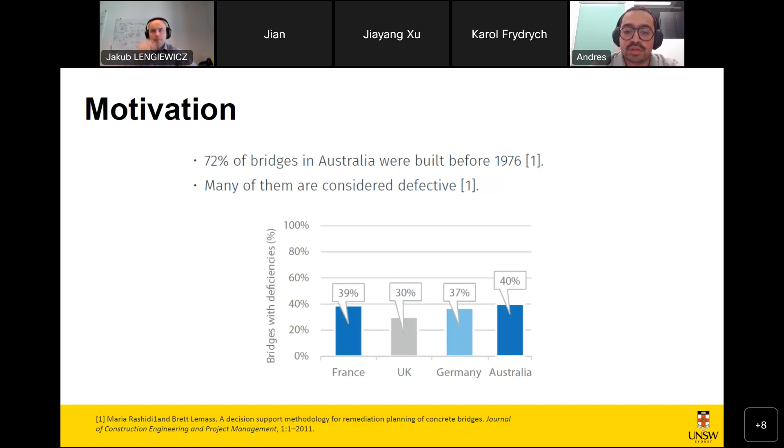Okay, so the motivation for studying bridge health monitoring is that currently in the world a large percentage of structures, especially bridges, have already completed their average expected service life. For example, in Australia, around 72% of bridges were built before 1976, so they have already completed their average expected service life. And many of them, not only in Australia but in the world, are considered defective. Approximately 40% of the bridges around the world are considered defective.

So currently in the world, there are two main types of inspection that are applied to any type of bridge. The first one is visual inspection. This type of inspection is a very time-consuming task, and as you might imagine, it is very subjective to the inspector's criteria. Even though there are standards for doing this, it's still a subjective task, and again, very time-consuming.

On the other hand, we have conventional structural health monitoring systems. These systems involve the installation of many different types of sensors on the structure, which measure its response. From the measured response, we can identify whether the structure is in a healthy state or damaged. But the problem with these conventional systems is that they are very expensive in terms of installation and maintenance, and they are unique for each structure. So applying this technology to all the bridges in a country would be a very expensive task.

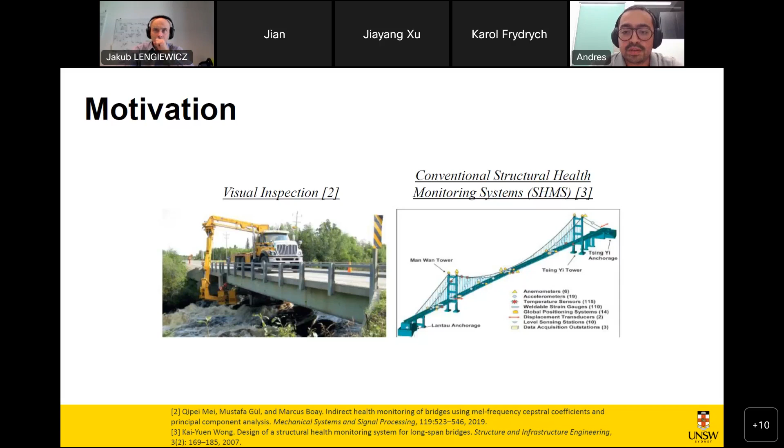So for this reason, during the last decade, researchers have studied a new alternative called drive-by bridge inspection, which is an indirect structural health monitoring technique. This technique consists of an instrumented vehicle, generally instrumented with accelerometers. The vehicle passes over the bridge, recording an acceleration signal, which has information from both the bridge and the vehicle. So this response has coupled information from the combined bridge-vehicle system, and by studying this signal, we are able to identify whether the bridge is damaged or not.

So the advantage of this method is that it's much cheaper than conventional structural health monitoring systems. And also, they have the ability to be extended to different structures. So those are the main advantages of this. However, there are still many challenges to cover with this technique, and today I'll cover some of them.

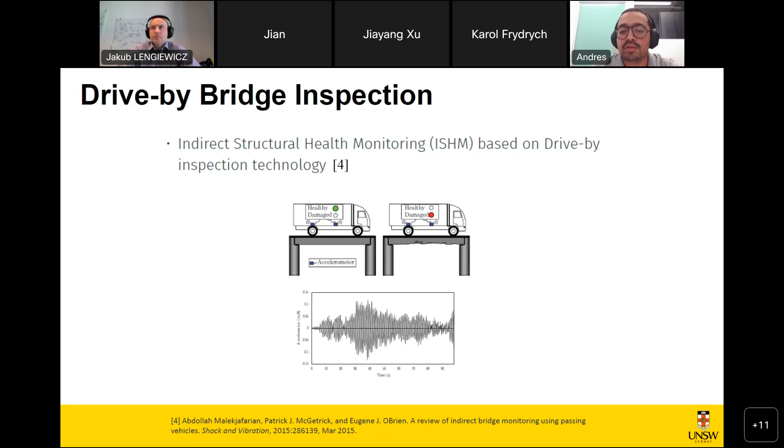Okay, so when studying these signals recorded by the sensing vehicle, we can divide or classify these techniques into their level of damage assessment. So the levels of damage assessment are three main levels. The first one is only damage identification. Level 2 is localization, and level 3 is quantification.

Additionally, these techniques used to identify the signal from the vehicle can be classified into major groups. The first one is physics-based methodologies, which can reach up to level 2 of damage identification, that is localization. But these techniques require previous knowledge of the structure, such as the dynamical properties and other types of properties of the structure that we can compare with, that are taken as a benchmark state and then compared with other extracted features from the signal to assess the damage. So this knowledge of the structure is not always available. So this is a major drawback of physics-based methodologies.

On the other hand, we have data-driven methodologies that can reach up to level 3 of damage assessment, so we can identify, locate, and quantify the damage. These methodologies are mainly focused on signal processing and supervised machine learning. However, as you might know already, if we are trying to use supervised machine learning, we would require information from all the bridge states. That means healthy states and damaged states of the structure, which is very difficult to obtain. Probably it's impossible to obtain information from damaged states. And so training these algorithms in real practice is not always useful.

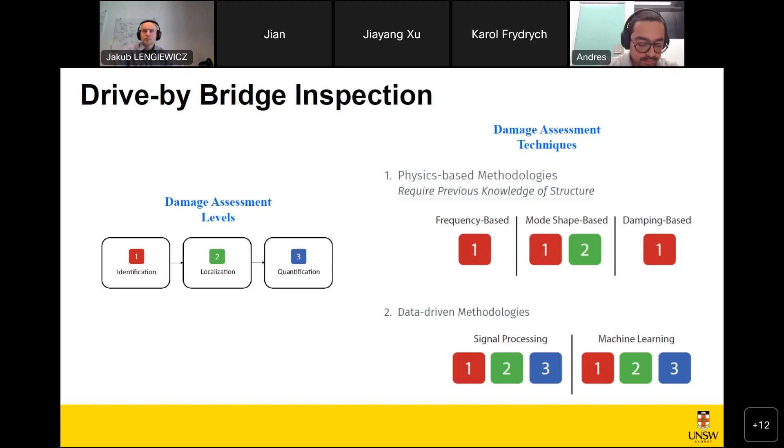So this is the reason why in our research group, we try to focus on developing unsupervised learning approaches, which are mainly trained with benchmark states of the structure or the healthy state of the structure. Okay, so now we'll talk a little bit about the convolutional variational autoencoder. Some of you might have heard about it. So as I mentioned, with this algorithm, we intend to use an unsupervised method to identify damage. And this method should only be fed with healthy data of the bridge, because in real practice, that's what we can measure in real structures.

So, okay, convolutional variational autoencoders or variational autoencoders are generative models used for unsupervised computer vision, and their aim is to reproduce images. So for the ones that are not very familiar with this topic, I'll go through the three families. So first I'll go through what is an autoencoder. So an autoencoder is a type of neural network whose aim is to reconstruct some input data, and to deconstruct some input data into a low dimensional space. And from that dimensional space, try to remap that input data. So basically, we have an algorithm that is trying to reconstruct our input data.

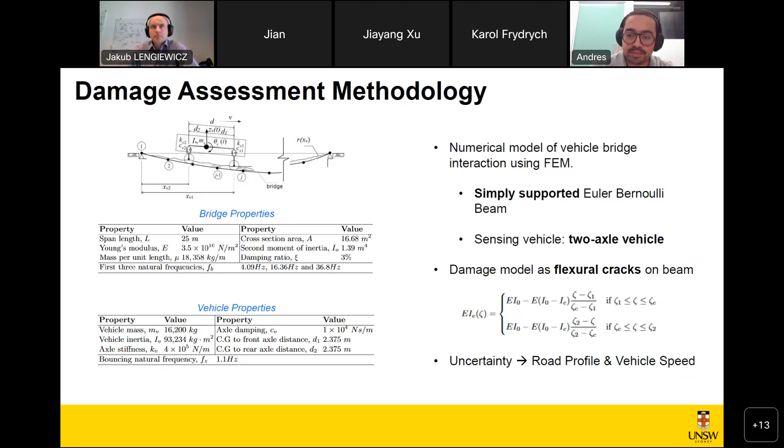The second step is to align the signals, because since this is a two-axle vehicle, the first step is to align the signals in space, so that the signals are aligned from the moment each axle enters the beam to the moment each axle exits the bridge. The next step in our processing is to calculate the continuous wavelet transform, which is a time-frequency domain representation of signals.

And we do this for both axles, from the acceleration from the front and rear axle. The third step is to calculate the residual CWT. And what is this residual? CWT is the difference or the subtraction of the CWT from each of the axles. The reason why we do this is because we notice, and it has been reported in other literature, that this process can partially reduce the effect of the road roughness in the acceleration signal that we measure.

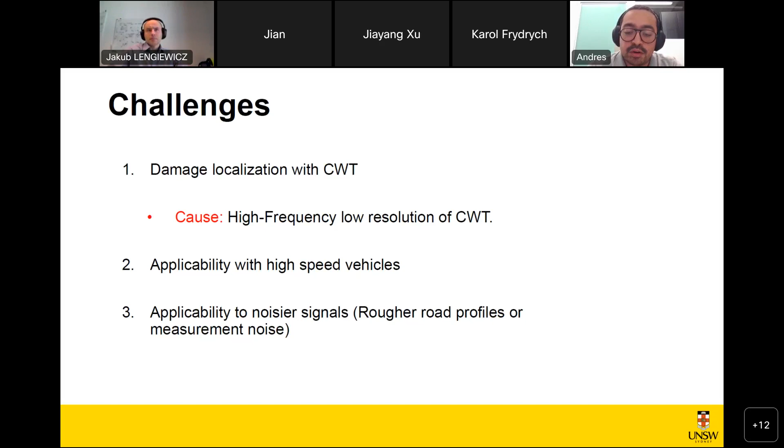And lastly, noisier signals can also reduce the performance of the algorithm. These noisier signals can come from rougher road profiles, or when the signal is very noisy, purely from the measurement noise. So our future work in our research group is to identify a better feature to locate damage, maybe a different time-frequency domain representation, different than the CWT.

The next step that we're working on already is the vehicle optimization, the properties of the vehicle, like the suspension, mass, and all this, because there's an important fact that different vehicle configurations can perform better than others. So a vehicle optimization is needed for this.

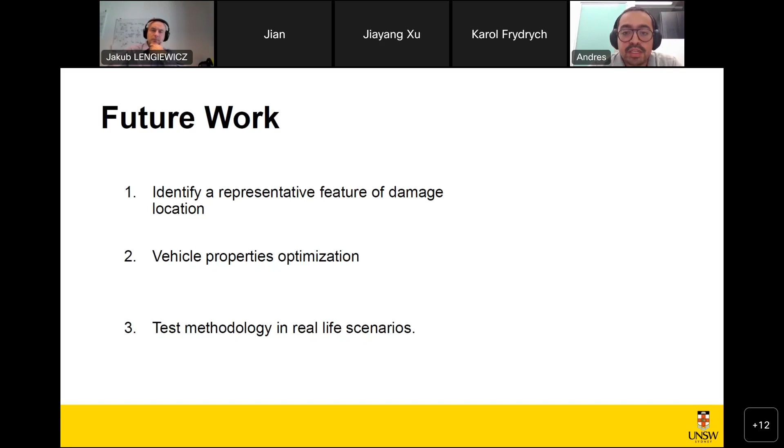So yeah, that's it for our presentation. This is our methodology for bridge damage assessment.

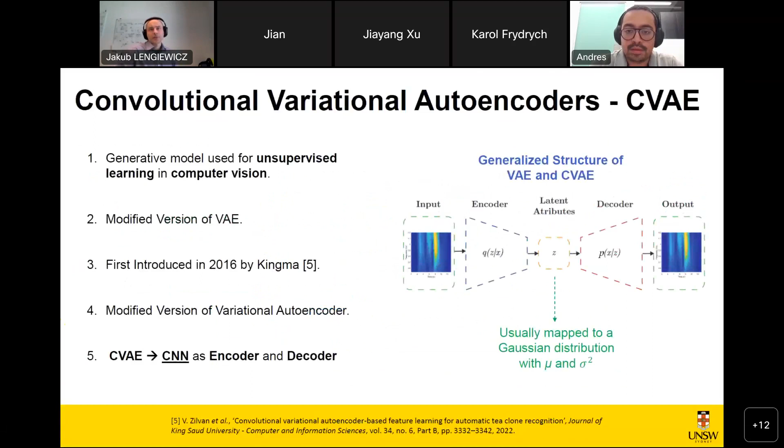So let me ask a question about the neural network model, the deep learning model that you are using. It is a stochastic model, right? Variational Bayes for this sort of model. But I was not sure what exactly the model was, how it was built. Can you show maybe one of the first slides in which you showed the architecture of your neural network? Something like this. Okay, this one is good, the schematics.

So you have this encoder part, then you have some latent layer or latent neurons, and then you have the decoder part. And this is the autoencoder setup, right? So you are aiming to have the same input and output. That's your loss function, that's the aim. Yes. And then you mentioned that the stochastic part of your neural network is the latent part, right? So my first question is whether the stochastic parameters are the weights or the neurons themselves, the values. What's your stochasticity? Those are the values.

Because that's how I understand it, that's the difference from a variational autoencoder to an autoencoder. An autoencoder just generates this low dimensional output from the input, and purely from that low dimensional output, you pass it through the decoder and try to reconstruct the image.

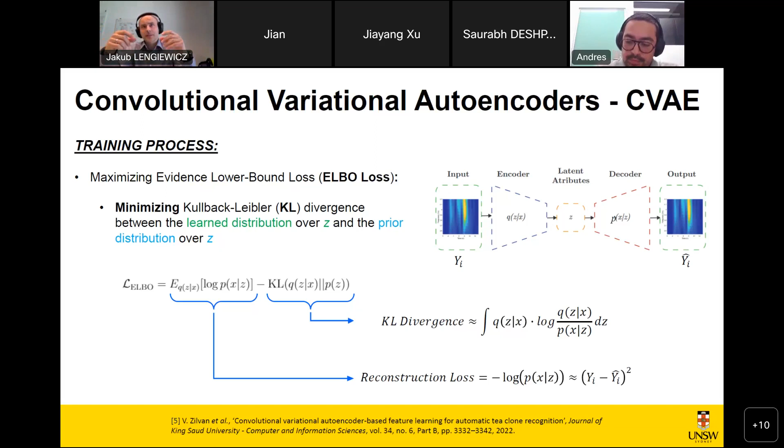So this framework, once you have it, this unsupervised autoencoder framework with these stochastic capabilities, how is it then used in the damage detection to compute the damage index? Either I missed it in the presentation, or I was taking some notes when you mentioned it, but I didn't get the idea how this neural network or deep learning framework is then used in the identification process. This was not clear.

Okay, so as I mentioned, the training process is performed using only images, like CWTs, from the healthy state. So basically, the algorithm learns to reproduce images only from this state. The way we use it for damage identification is that when we input a CWT that is somehow different from the inputs used for training, the reconstruction error is increased. So we use this error as a damage indicator.

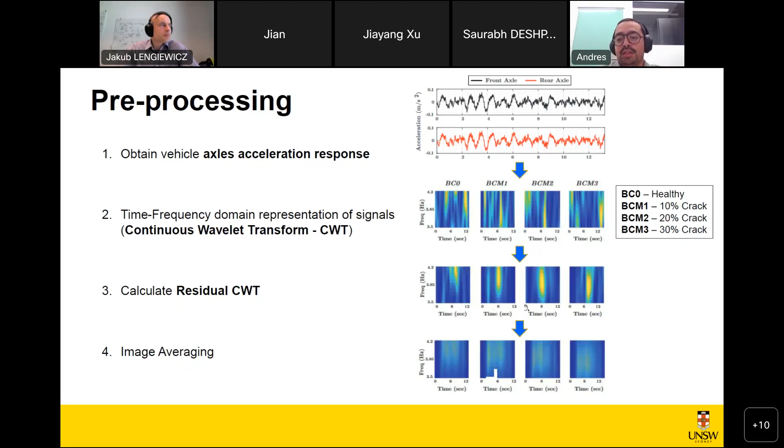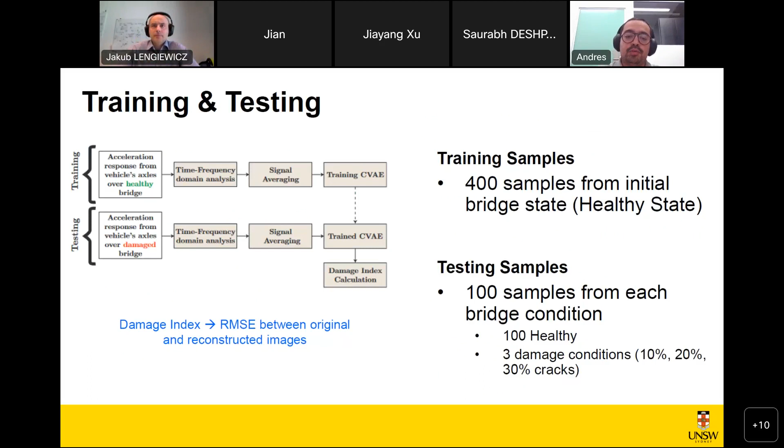So you need to have a healthy model for each bridge, more or less. Yes, exactly. In practice, we wouldn't call it a healthy bridge. We will call it a benchmark bridge, because from the starting point we don't really know if the bridge is healthy or not, but we will consider that as our benchmark. The data from that benchmark state will be used for training, and any change in the signal representation representing changes in the dynamical properties of the bridge will be identified based on that benchmark state, which for the numerical case is the healthy state.

Okay, I see the point. And how can you know that the model cannot perform well for the damaged bridge? Because this is a crucial point for your measurements. Is the assumption that if you have a different frequency profile, the model will give a higher error? Yes. Encoding, decoding, right? So how can you be sure that the model will not extrapolate or interpolate the data for the damaged bridge?

Yeah, that's a very important question. There's a trade-off for low severity damage. So two important things about the vehicle-bridge interaction system. When vehicles cross over the bridge, the coupled system has a combined natural frequency, which is not the same as the bridge's. But when you analyze the spectrum of the signal, you can identify the real natural frequency and the combined natural frequency, which is called the deviated natural frequencies of the bridge.